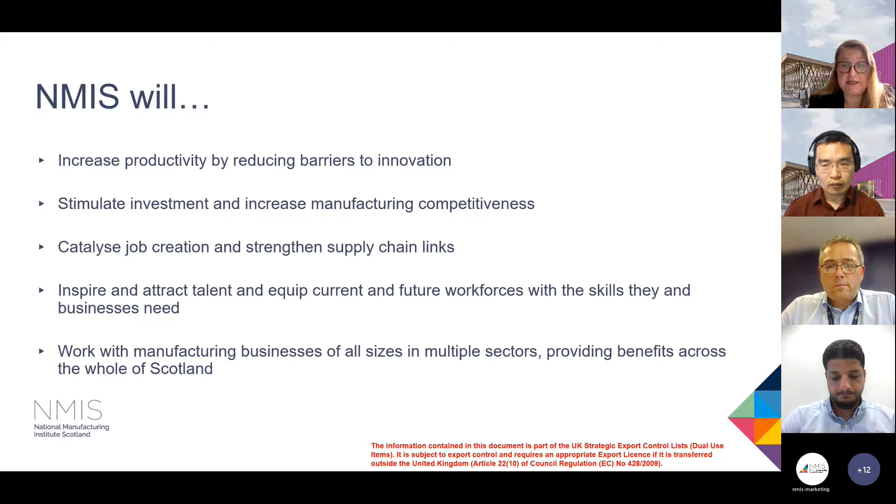We also do a lot of work to inspire and attract talent and equip current and future workforces with the right kind of skills, particularly in the areas where shortages of skills are experienced, such as digital manufacturing of the future. As an organization, we work with manufacturing businesses of all sizes in a multitude of sectors, providing benefits across the whole of Scotland. And as today's example will tell you, we also work across the UK with industry stakeholders, and in particular SMEs.

Thank you, June. So NMIS is operated by the University of Strathclyde, and we're also supported by our partners and funders in the One Scotland team, which include the Scottish Government, Scottish Enterprise, Highlands and Islands Enterprise, and South of Scotland Enterprise. We're also working locally very much with Renfrewshire Council, where we are physically located. Scottish Funding Council are also our supporters, and Skills Development Scotland, of course, very important as per our skills agenda.

And of course, last but not least, our centre is also a member of the High Value Manufacturing Catapult of the UK, a constellation of 7 catapult centres across the whole of the UK. Next slide, please. So just a brief overview of what the NMIS group consists of.

We are a group of several specialist technology centers, and we're also very much supported by a very active network of partners in the manufacturing community, and that includes not only the HVMC community, but also the academic community across Scotland and across the UK as well.

So the Advanced Forming Research Centre, in particular, focuses today on technologies such as incremental near net shape forming and forging, of course. Residual stress measurement is another element of what we do. And also, we do all kinds of work in engineering in metallics pertaining to materials and components. So the focus is mostly on metallics, but also on other solid materials.

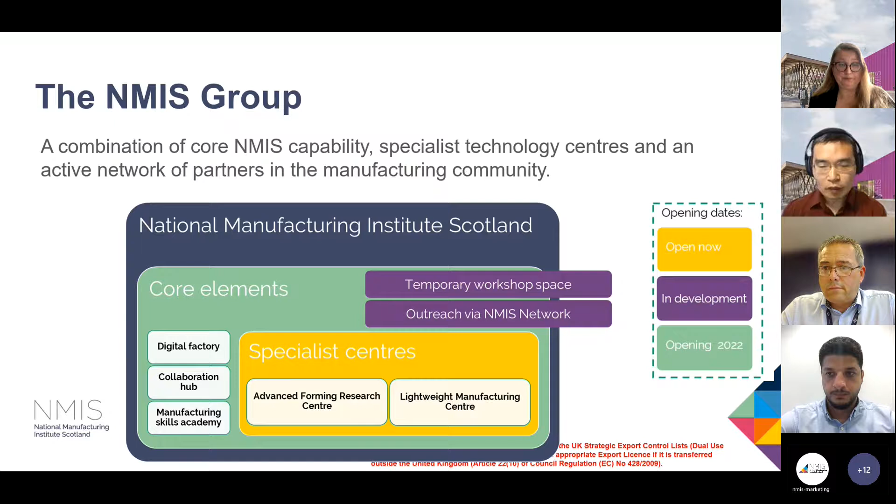Okay, here comes our research work. This is the introduction of my research work. Our research work was funded by the Niche Vehicle Network and AFRC internal funding. The AFRC forming team collaborated with PAB Coventry to identify a new way to manufacture lightweight, large, and complex vehicle components. Automotive and aerospace sectors are quite distinct in terms of production volume, quantity requirements, manufacturing cost, and product development lead time.

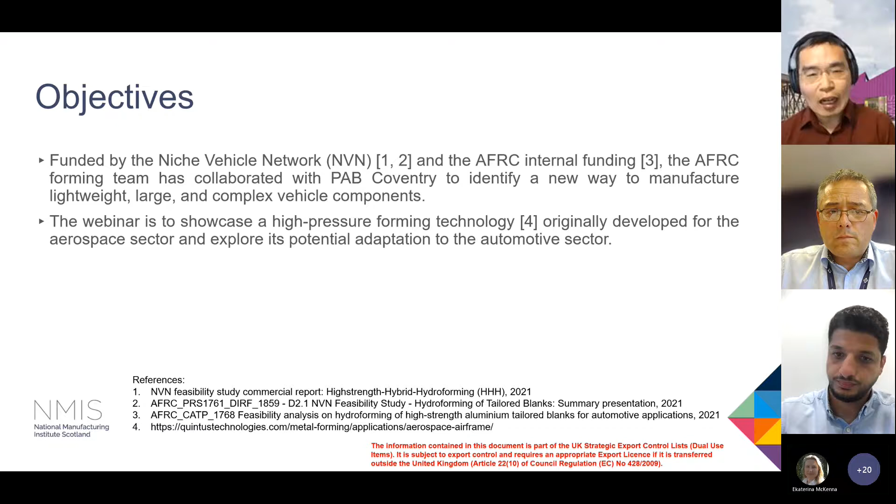So this webinar is to showcase a high-pressure forming technology originally developed for the aerospace sector and explore its potential adaptation to the automotive sector. A good understanding of the manufacturing challenge of the beneficial sector is required in order to propose successful cross-industry transfer. So, the low and medium volume automotive sector and in-service part replacement market have been targeted with the technology demonstrated in this case study.

Here comes the background of our research. As the world pushes towards net zero emission targets, there is increasing demand across the automotive sector to reduce vehicle weight and therefore CO2 impact. This drive spans the entire industry from mass-produced models to heritage cars in the niche vehicle sector. So, the hydroforming process is understood to have significant potential to enable forming of a great range of sheet metal materials for industrial application. In this case, lightweighting is one of the objectives targeted by the process.

Hydroforming can provide simplification in terms of the process steps or the tooling. A simplified manufacturing approach is an essential requirement to any industry, particularly in forming. So reductions in the number of process steps or in the tooling result in cost saving and less maintenance requirement. As shown in the figure, in the conventional forming process, different parts are formed separately and subsequently joined together, whereas in the proposed approach, we use tailored blanks as the raw material, where blanks are joined together prior to the forming process. Tailored blanks offer an opportunity for weight reduction, while maintaining the structural integrity of the part. Definition of the process variables and the subsequent optimization are investigated to form those complex parts.

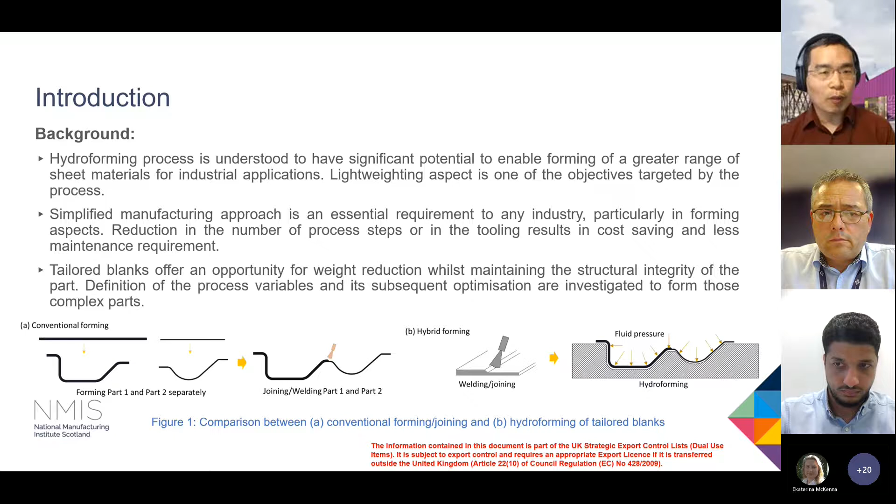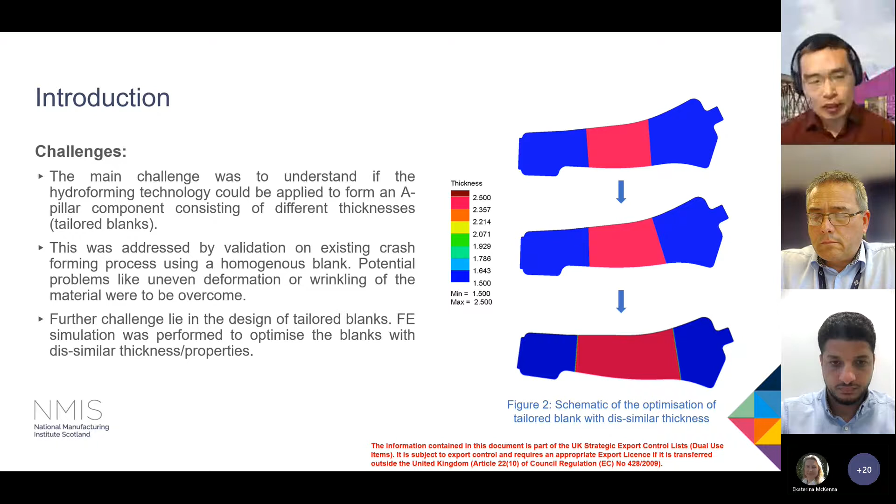However, there are still some challenges to be addressed in our research work. The main challenge was to understand if the hydroforming technology could be applied to form an A-pillar part consisting of different thicknesses, which is tailored blanks in our case. This was addressed by validation on an existing crash-forming process using a homogeneous blank. Potential problems like uneven deformation or wrinkling of the material were to be overcome. In addition, a further challenge lies in the design of tailored blanks. As you can see on the right side of the figure, FE simulation was performed to optimize the blanks with dissimilar thickness or property of tailored blanks.

And how did NMIS and AFRC help? The team was able to validate the feasibility of the hydroforming technology applied to the tailored blanks for an A-pillar component. The validation was done at the simulation level, and it is expected that experimental trials will show very similar results. As a consequence of this analysis, industry could form a lighter component through simple and less costly tooling, while maintaining the strength and the rigidity of the original part design. The AFRC team developed an FE model to explore the feasibility of this approach, and the analysis compared different forming approaches, including homogeneous thickness and dissimilar thickness tailored blanks.

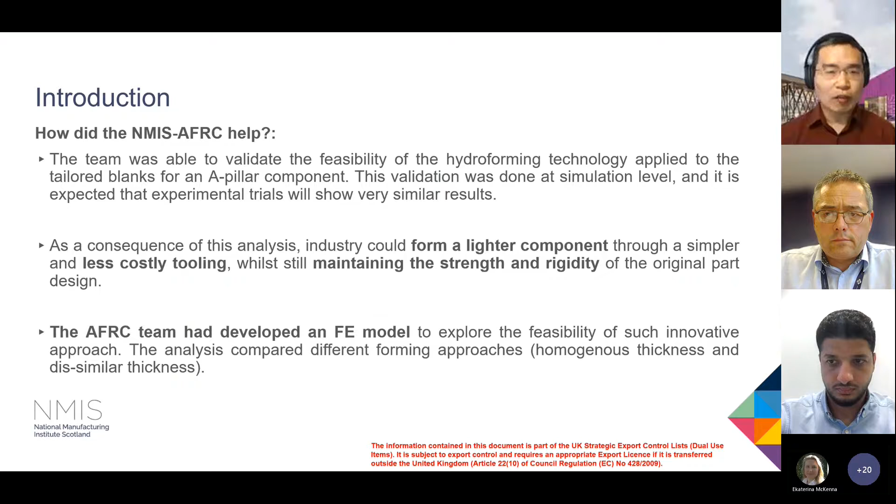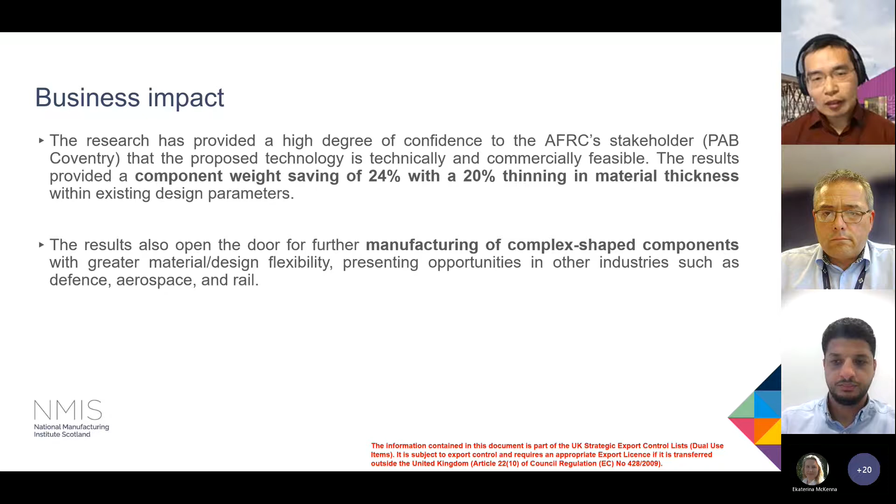And this research had provided a high degree of confidence to the AFRC stakeholders, especially for the PAB Coventry, that the proposed technology is technically and commercially feasible. The result provided a component weight saving of 24%, with a maximum 20% thinning in the material thickness within existing design parameters. The result also opened the door for further manufacture of complex shaped components with greater material or design flexibility, presenting opportunities in other industries such as defense, aerospace, and rail.

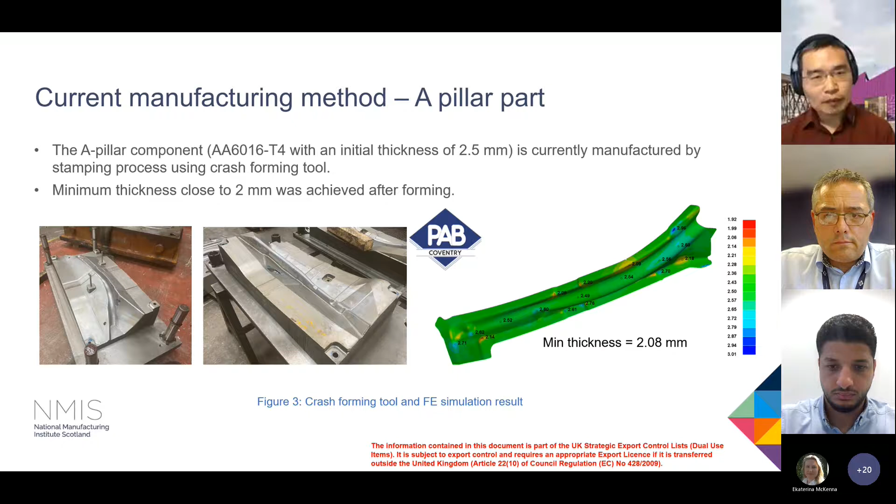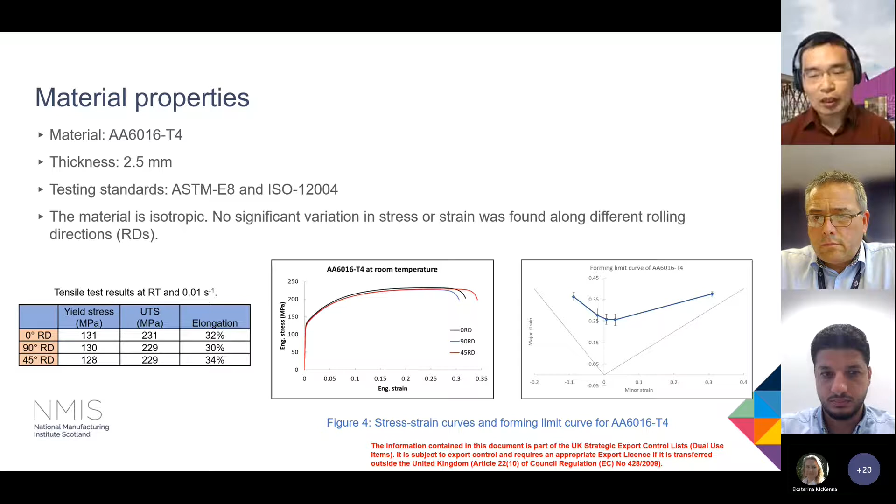In the next few slides, I will invite my colleague Ahmed to introduce the modeling and tooling design part. Thank you. Pass my microphone.

Yeah. Thank you, John. So after the material testing and material characterization, now we can start with the material modeling. Three main sections for the material modeling must be identified. First is the hardening curve. Second is the yield criteria, and of course, a failure criteria. For the yield criteria, we decided to go with Barlat 2000 after comparison with different yield criteria. While for the failure criteria, we of course have the forming limit diagram for the initial thickness of 2.5. Next, please.

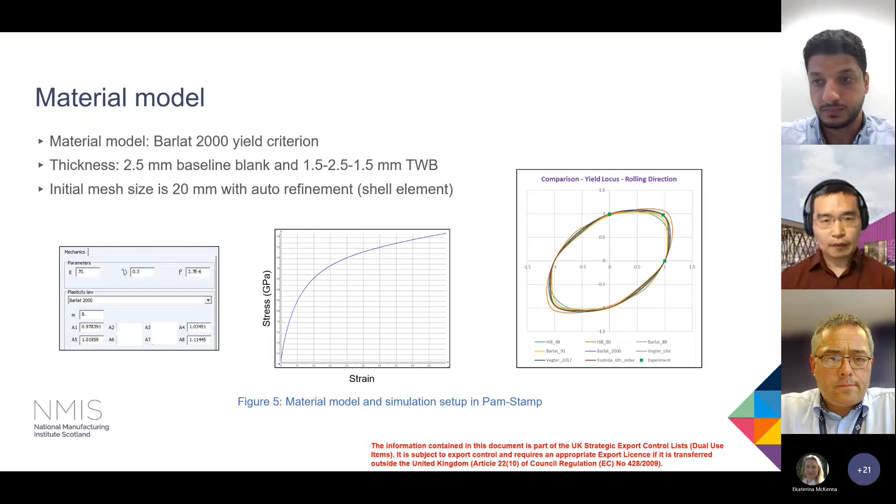Now we can jump to the tool design. So originally we investigated two setups. First is the concave for this type of setup. Of course, we have two general setups, which are a punch and cavity tool, but here we decided to name it as concave and convex because of the type of the shape. For the concave here, we decided just to do a simulation to judge the flow of the material. So by applying a fluid pressure, we can see some wrinkling that can appear in the part, which means that the material is not flowing very well. And that is because of the difference in the height of the edges of the two parts. Next slide, please.

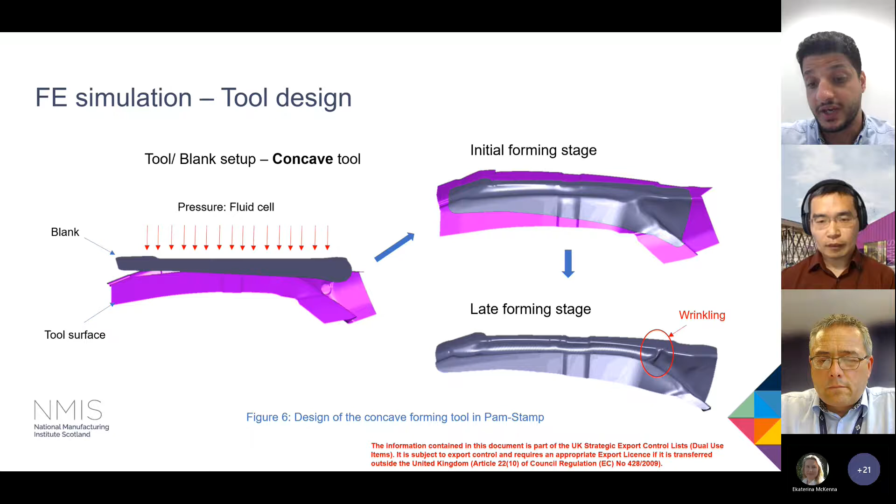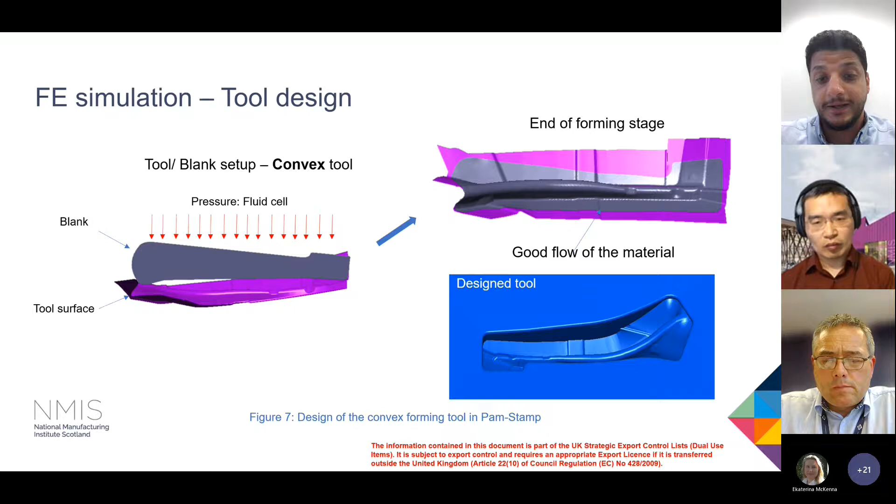We decided to go for the different setup, which is convex. So here we judge the flow of the material. So it is very important here to consider two main things: the ability to form the deep corners with small radii in the part, and this should be done by achieving full contact with the tool surface. But also we must consider here avoiding tears of these small features. Next slide, please.

So this is the final setup that we decided to go with. The maximum pressure is between 800 and 850. We will apply a fluid cell for the pressure. It is very important here to consider the loading of the tool itself, or the pressure. So if we look to the image on the right, and if we have a straight line from the initial load to the maximum load, above this line we have high stretching, which is shown in the orange curve. But you need to take care of the tears that might happen as well. In the blue curve, we have the low stretching, which is the low loading curve, but you might have some level of wrinkling.

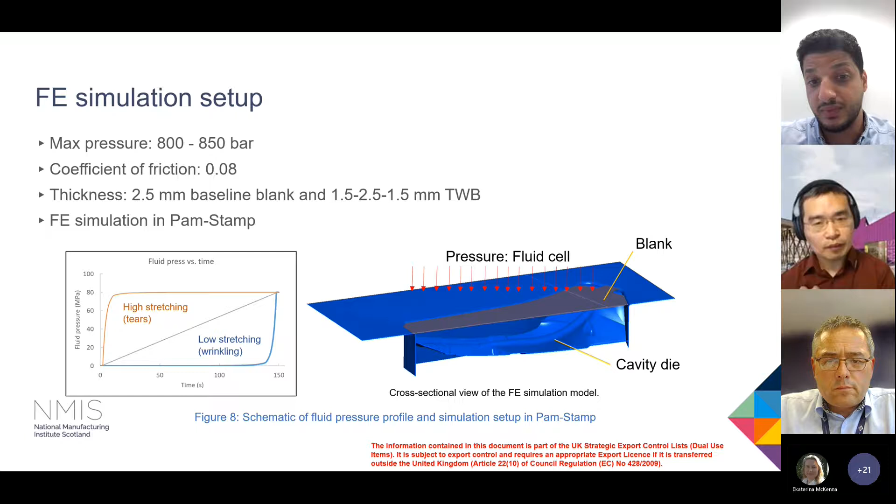So next slide, please. So as I said, you need to have a balance between the two loading curves. Here also is an investigation of the effect of the blank shape and also the loading curve, and its effect on the failure of the part, especially in the small corners.

So we can see in the first image on the top right, we have some failure in the small corner there. But when we just change the tipping angle or change the blank shape as well, this can change the amount of failure that you have.

And this is mainly because of the amount of blank holding that you are controlling during the hydroforming process. So you should consider mainly the blank shape and the load curve to control the material flow and have a balance between flowing of the material and stretching as well.

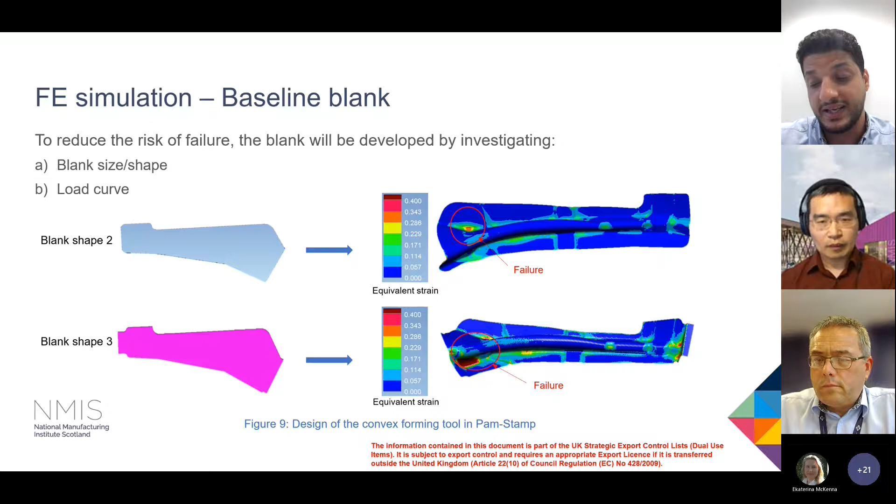Okay, after a series of blank designs, a final optimized blank had been obtained. In order to explore the forming potential applied to tailored blanks, two analyses were performed, including the homogeneous thickness blank on the left side figure with the original thickness of 2.5 mm, and the tailored blanks with dissimilar thickness, with the thickness distribution of 1.5 to 2.5 and 1.5.

Here you will see on the left the FE simulation result for the homogeneous thickness blank. The minimum blank thickness after forming is 2.14 mm, corresponding to a thickness reduction of 14%. You may still remember that the crash formed part in production shows a maximum thickness reduction of 17%. So hydroforming indicates a high potential for a slightly more uniform thickness distribution.

On the right side, you can also see the tailored blanks with dissimilar thickness. Here, in this case, the original thickness distribution is 1.5 mm on the two sides of the part and 2.5 mm in the middle of the part. The minimum blank thickness is found on the center part of the blank with a thickness reduction of 20%.

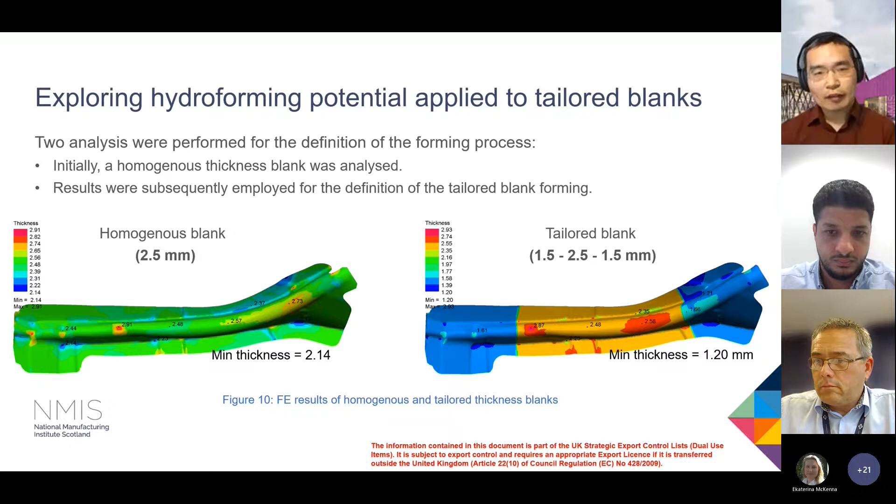It can be seen that the strains for all the elements are far below the forming limit curve, indicating the feasibility of the hydroforming process in the forming of blanks of homogeneous thickness and dissimilar thickness. FE simulation also provided us with the opportunity to investigate the key process parameters, including the pressure cycle, friction effect, blank design, tooling design, etc. Future process optimization could consider these factors and further validate against experimental trials.

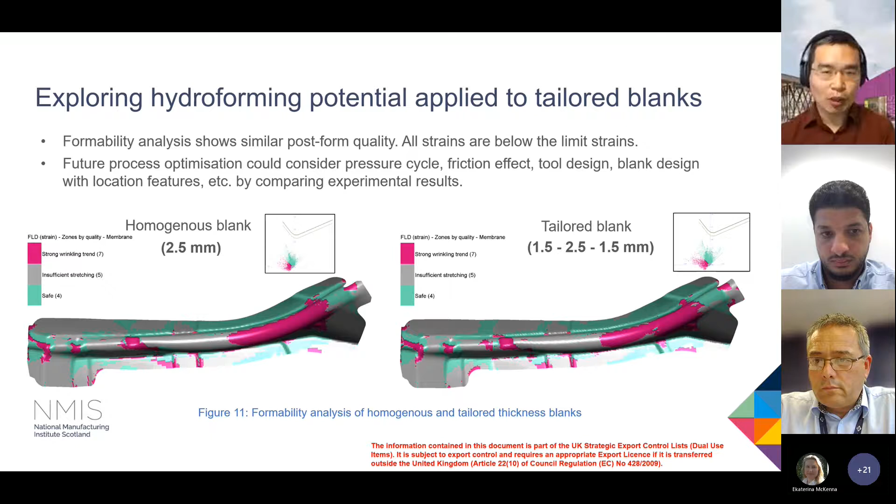Okay, here comes the summary of our research work. Feasibility of the hydroforming technology to form a tailored thickness A-pillar was proved by simulation. When applied to tailored blanks, hydroforming allowed for a simplification of the process, as no upper tooling is required, also avoiding the blank holder problem. This results in a cheaper solution, which would also require less maintenance.

In terms of lightweighting, the tailored solution results in a potential weight saving of 24%. By using the tailored blanks, the weight is calculated at 0.71 kg against the original design of 0.93 kg. In addition to the weight saving capabilities, tailored blanks also allow various different parts to be formed simultaneously, consolidating multiple operations such as joining and forming.

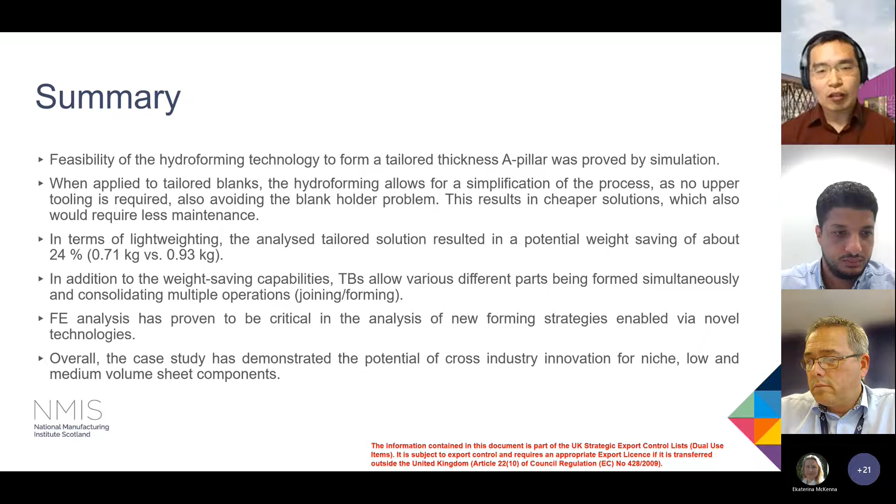FE analysis had proven to be critical in the analysis of new forming strategies enabled via novel technology. Overall, the case study had demonstrated the potential of cross-industry innovation for niche, low, and medium volume sheet components.

No voice. Mark, there's no voice. There's no sound, Mark. I don't know if you can turn it on. Sorry? No sound. We can't hear the sound of the video. Oh, okay. Just try that again. It was me. I didn't click that button. I do apologise. No problem at all. Let's start again. Can you hear that? That's perfect.

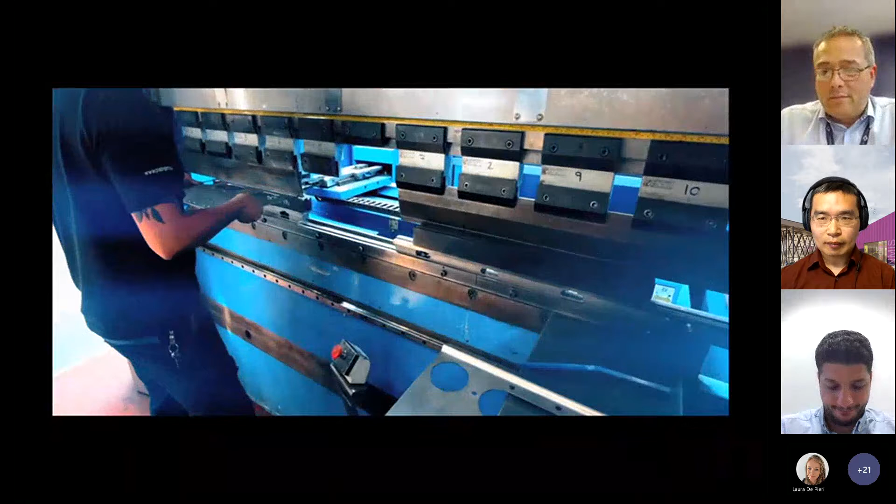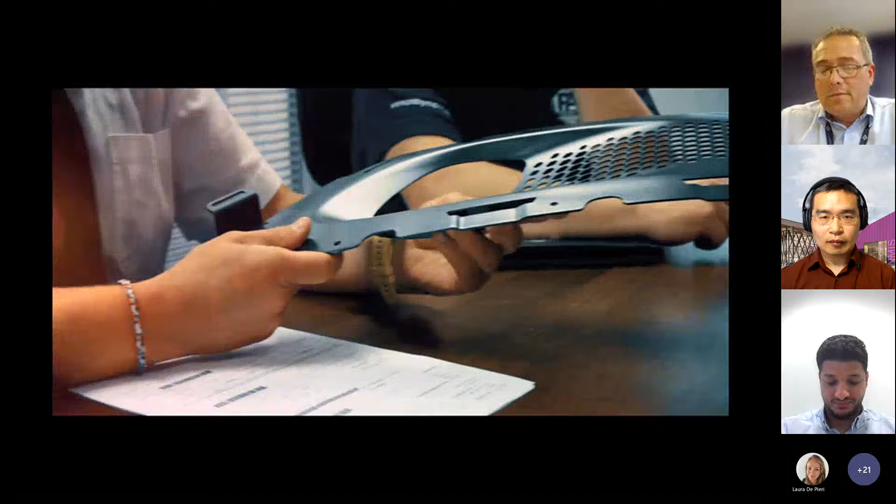Thank you. Have you ever seen sheet metal turned into speed? Or sheet metal turned into art? What about sheet metal turned into a solution? From the automotive and rail industries to defense and vehicles of the future, we've forged partnerships with some of the most technologically advanced organizations on the planet, working with them to solve complex problems by developing truly remarkable solutions.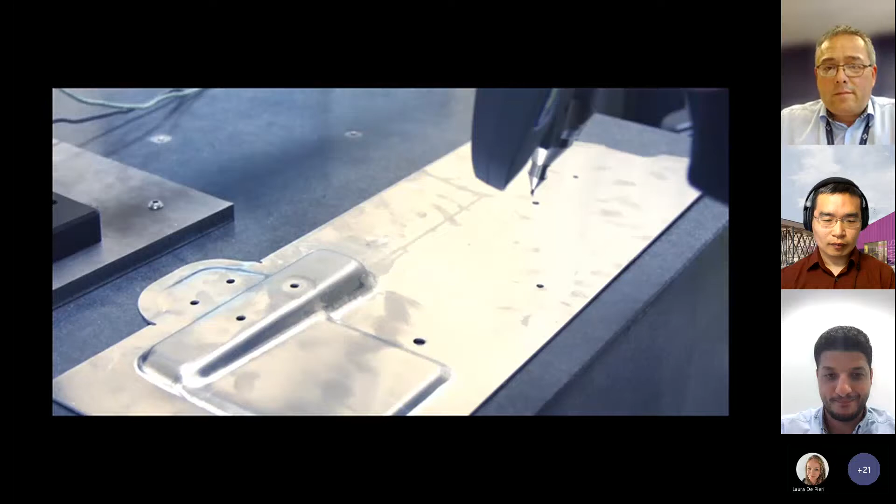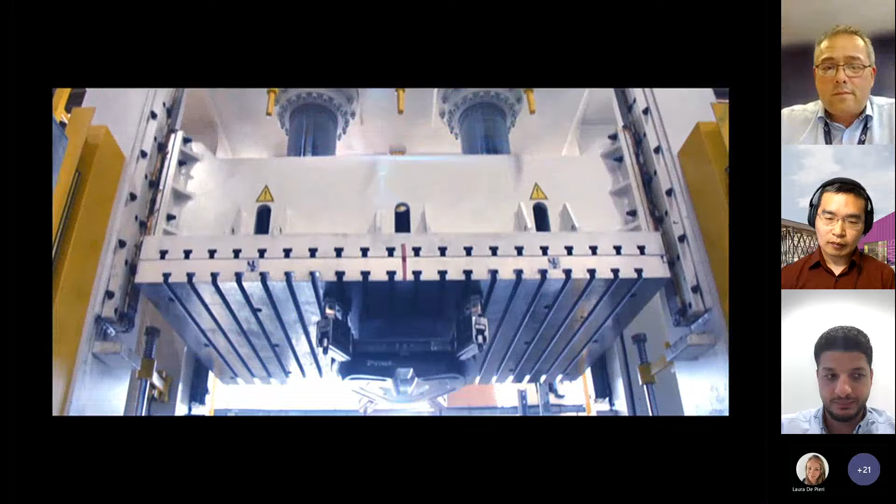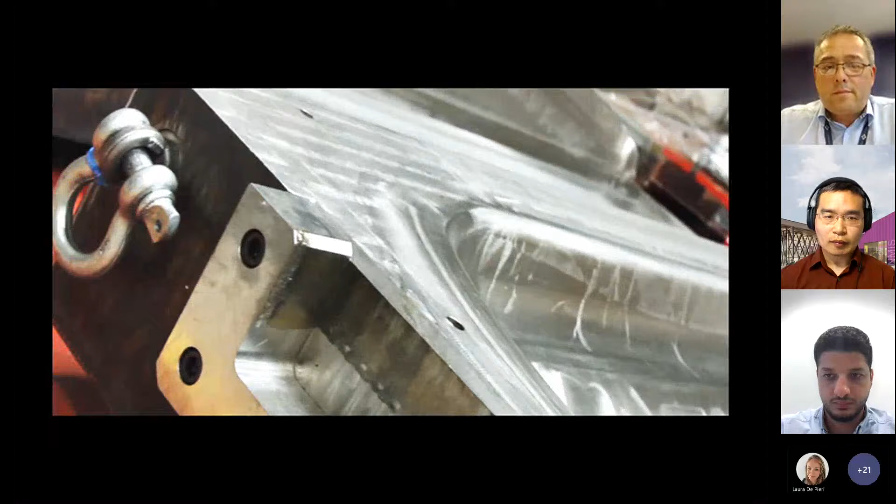We design, we cut, stamp, shape, weld, and assemble, all to the tightest possible tolerances. We provide bespoke sheet metal solutions for clients who demand the best and nothing less. And we've been doing this for more than 3 decades. In that time, we've delivered every solution our clients have asked for, and a few they didn't even realize they needed. So if you want to see sheet metal turned into the solution you're looking for, you've come to the right place. PAB Coventry.

So a little bit of history about PAB. As Katia said, the business was set up in 1986, and it started supporting panel modification to Leyland DAF vans over in Birmingham. Over the 35 years it's been going, we've now grown into 60 plus personnel, and we're constantly trying to increase turnover year on year. The last couple of years have been slightly difficult with the pandemic that's been going on.

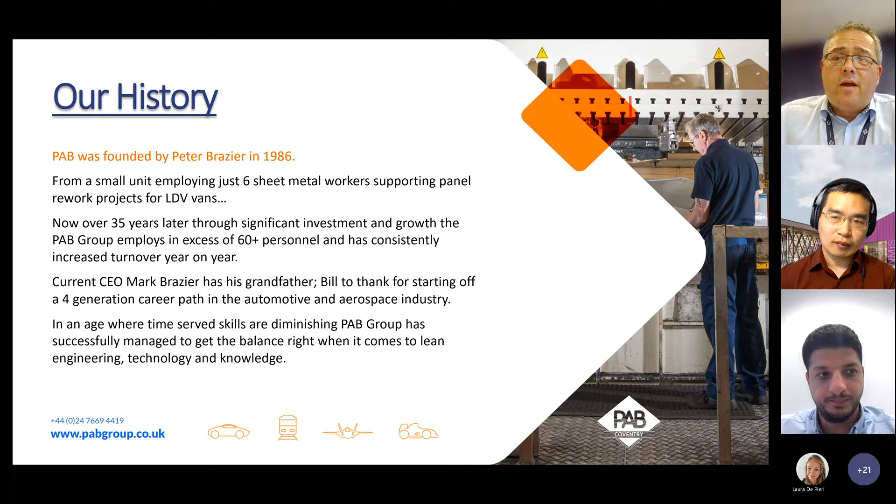What we try and do here is mix modern technology and traditional skills to offer very bespoke products to the niche vehicle market. So just a little bit about what we do here at PAB. We do a lot of R&D, and for a smallish company, an SME like ourselves, it is hard. We work with Innovate UK, Horizon 2020 in the EU. We've teamed up with a number of universities, so Imperial College London, Nottingham University, Coventry University, and of course the work we've done with AFRC and Strathclyde.

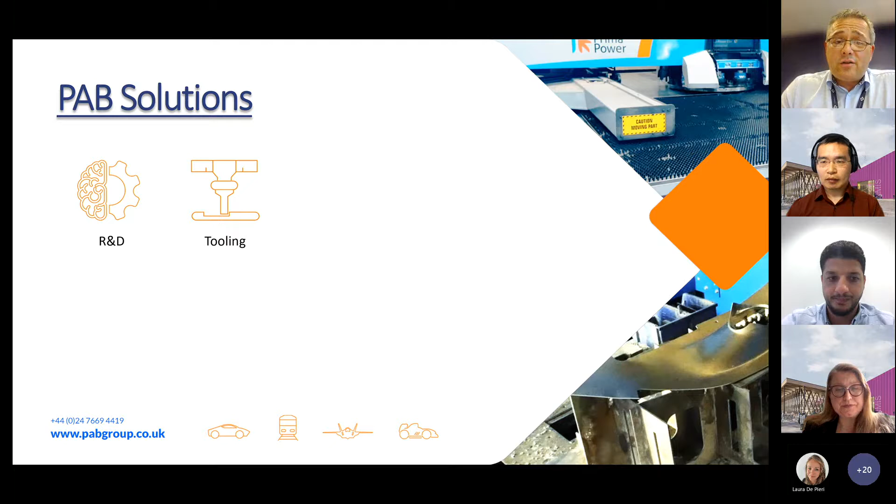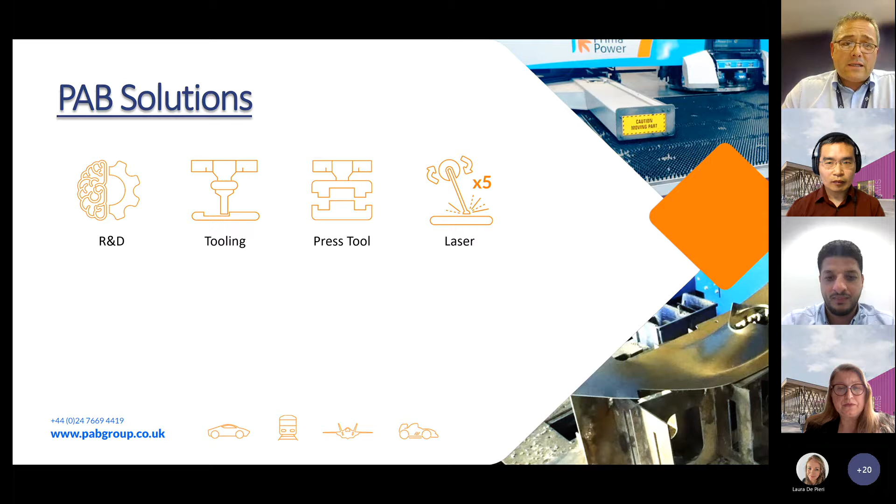Just a little bit also regarding, we manufacture standard tooling here at PAB. We can simulate standard cold forming and tool manufacture. We have a series of 5-axis lasers, 2-axis lasers to support component manufacture. We make standard basic components. We do a lot of visual components, so Class A sort of meshes, rear exhausts, mainly for automotive. Sub-assemblies, we do body in white assemblies as well, and recently, due to the demand of the quick turnaround, rapid prototyping requirements, we've added 3D printing.

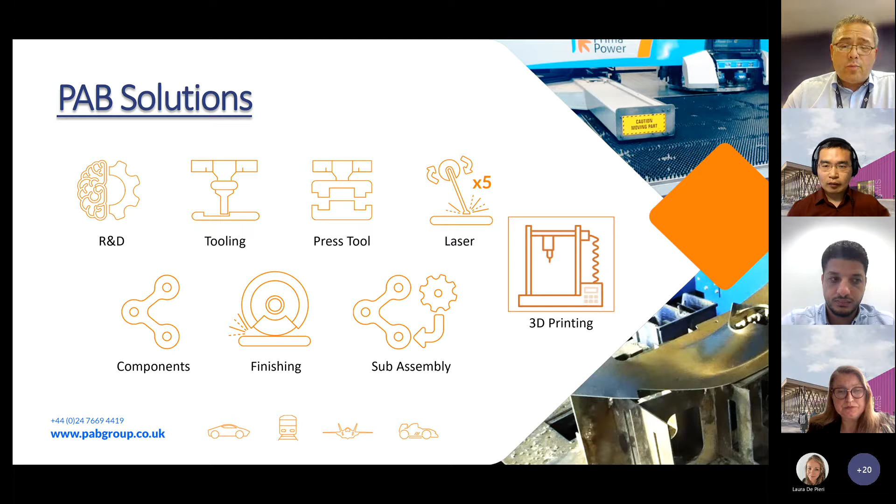And I think with this process, one of the biggest savings that the manufacturer will take is the reduction in cost of tooling. So no longer does that tooling need to be steel based. It can be a composite. Believe it or not, it can even be wood, as long as it can take a high compressive force. So you have quite a lot of cost reductions there. Obviously, with the cost of steel these days, that's a big saving for a lot of people. You only need a punch. No longer do you need a die or a draw ring. So you're making 1/3 of a tool basically.

Composite tooling is a lot quicker to machine than steel, and it's a lot easier to make changes and modifications. So I think from that point of view, the OEM will like this sort of tooling package. We can also reduce costs. It's very close to a net shape blank. Sheet utilization is a lot better. We can consolidate parts, and we can put multi-thicknesses like Jun has presented earlier, and multi-metals, so they don't have to be the same metals. They can be formed, not joined probably, but at the same time across the same tool.